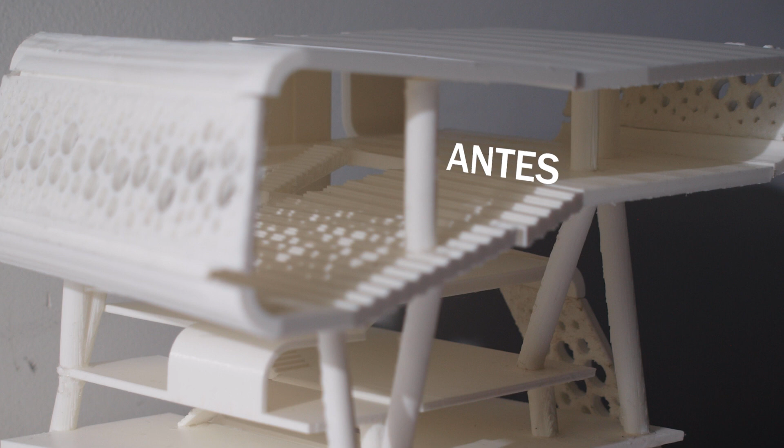We chose the Spanish word for 'before' in order to establish a connection between Rainey Street as it was before the Hispanic population was driven out due to businesses and corporations buying out land.

In 1990, Rainey Street had a small population but a high percentage of Hispanics. As time progressed and Rainey Street evolved, there was a massive population increase, and much of that Hispanic population was driven out.

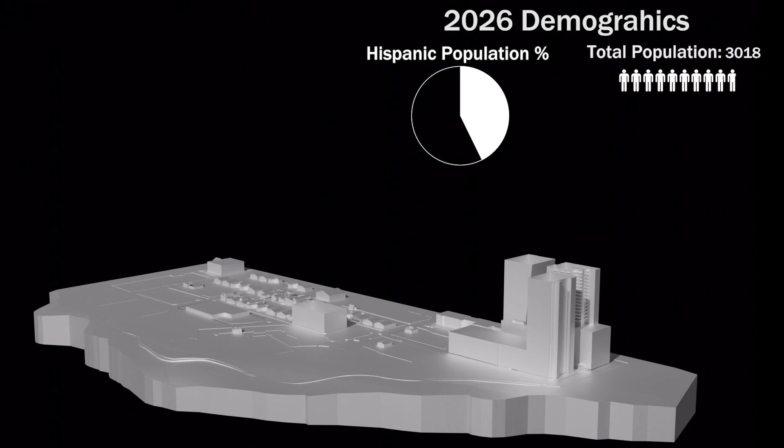To find a solution to this problem, we looked towards the Mexican American Cultural Center. We believe creating a connection with the MAC would help give incentive for Hispanic population and culture to be brought back into Rainey Street.

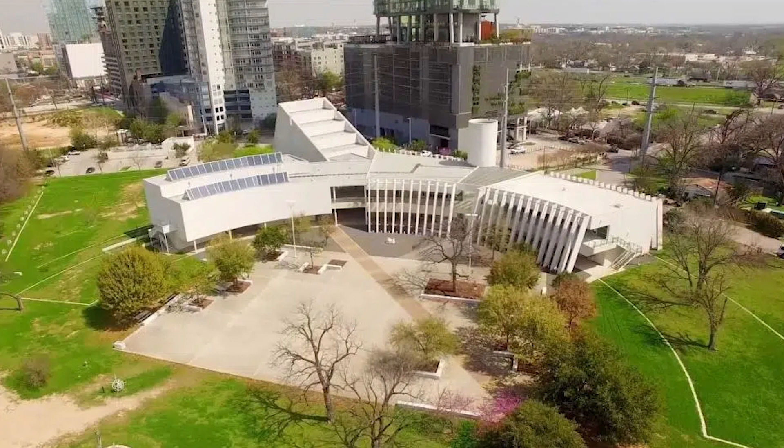Because we are trying to bring back the old Hispanic population, a lot of our programs rely on interaction and participation. For example, we have a church, and this area is missing a walkable church, so it allows the current community to attend church services, but also gives an opportunity for the old community to make their way back.

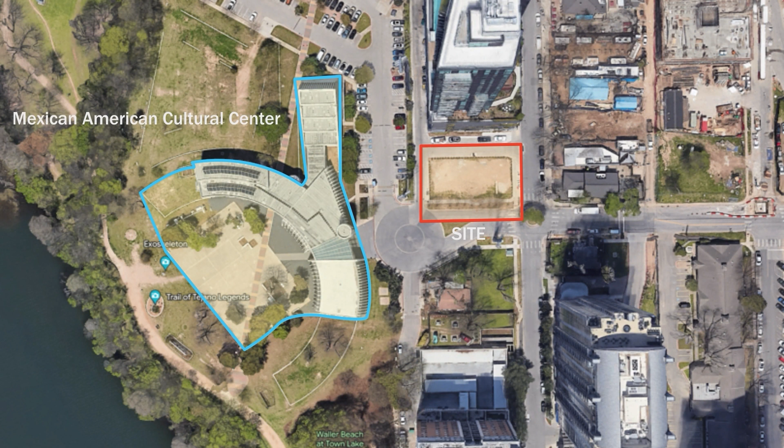This animation shows our site's proximity to the MAC and helps us understand where we are in relation to Rainey Street. This proximity is a key reason why we wanted to work with the MAC.

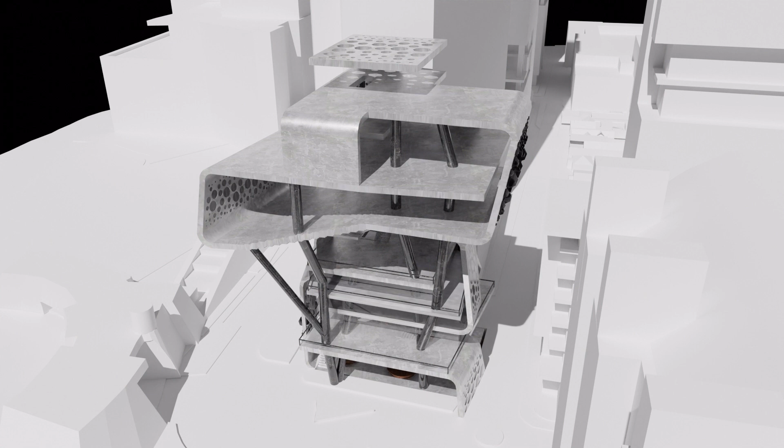Moving on to structure, a key concept we wanted to include during our design process was this wrapping of the floor plates. Almost all of our floors are interconnected to help create a cohesive design, and here our building finalizes by adding in all the details.

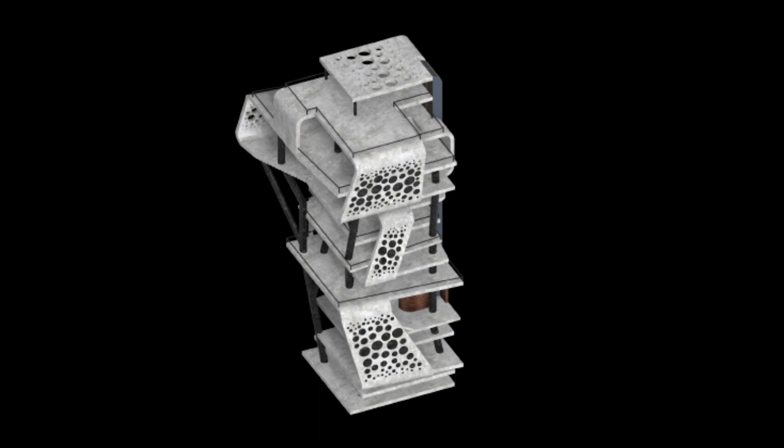We've mentioned that we want a connection to the older neighborhood, so why is our building structured the way it is and not like the old neighborhood homes? First, we wanted to contrast the shapes of the nearby skyscrapers, hence the wrapping floor plates and columns. Second, the floors and walls are interconnected but allow space to see into floors below or above. This creates a feeling of being enclosed, but connected, like a neighborhood.

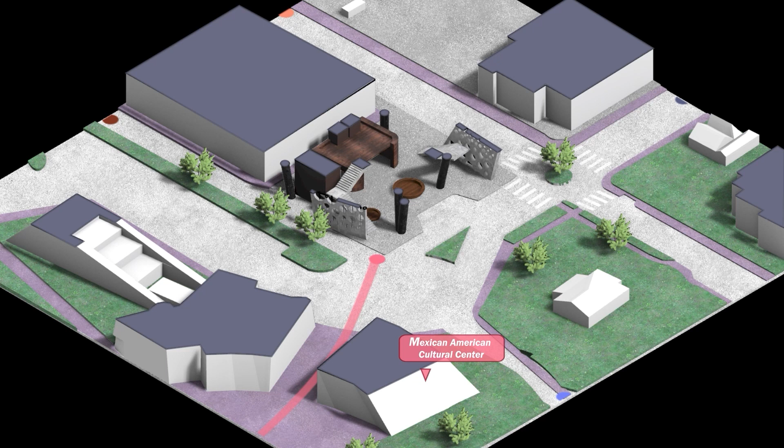This animation shows the interaction with the ground floor. The pedestrian pathways include people coming from the MAC, people coming from behind 70 Rainey and the rest of the Bar District on Rainey Street, and people coming from the walking and bike trail along Lady Bird Lake.

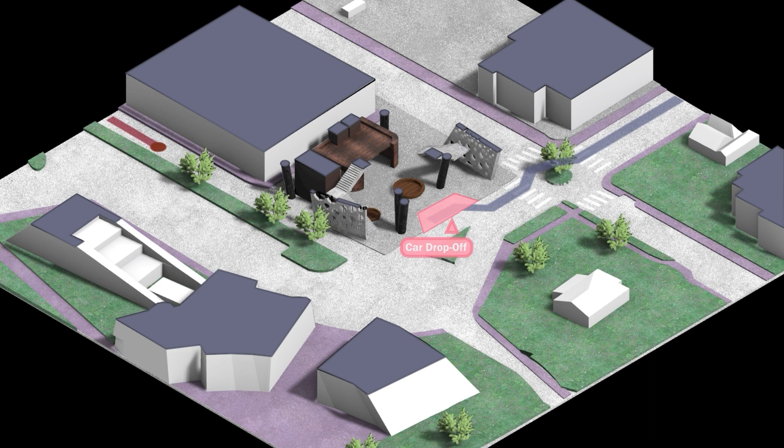As for vehicular transportation, there's a car drop-off coming from River Street, since a lot of people rely on Ubers, but if people choose to drive themselves, there's a car elevator that takes the car into an underground parking. This is an image of our program to show the relationship.

Underground parking is at the bottom, bar section right under the lobby, above the lobby is the vendor spaces, above that is the mall section with boutiques under the food court. To separate the spiritual zone of the church, there is a garden entrance and space, then the church, then the classrooms and play areas connected by the church community, and finally the rooftop lounge.

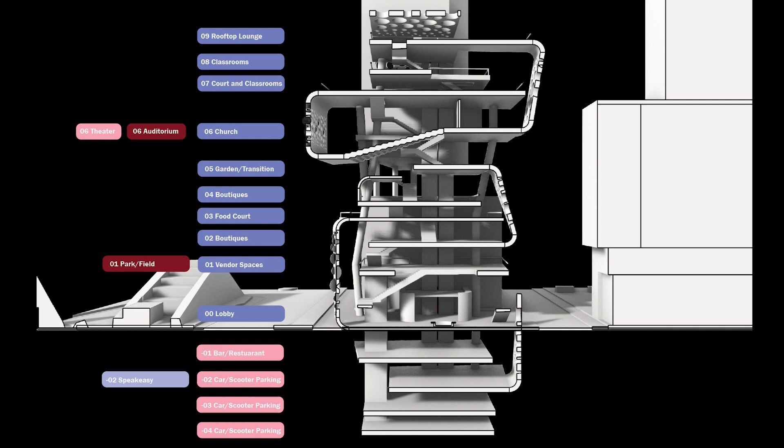This animation shows how the building is used throughout the day. An earlier comment we received is that the building was only used during the day on the weekends, especially with the church and the vendor spaces.

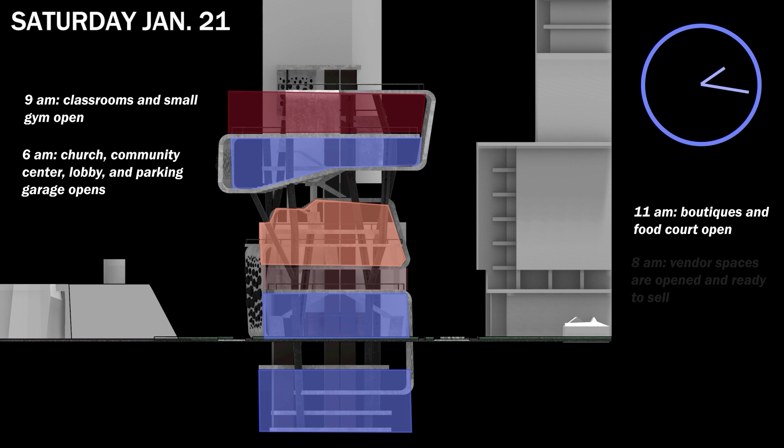However, in the final design, there are three interchangeable spaces to allow maximum use. The church space can be changed to an auditorium for TED Talks and other presentations, and later into a theater to watch movies. Once the vendor spaces clean up and move out, that space can be changed into an open field to play games like soccer, since that floor is grass. And the first floor of the car parking can be changed into a speakeasy to maximize use at night.

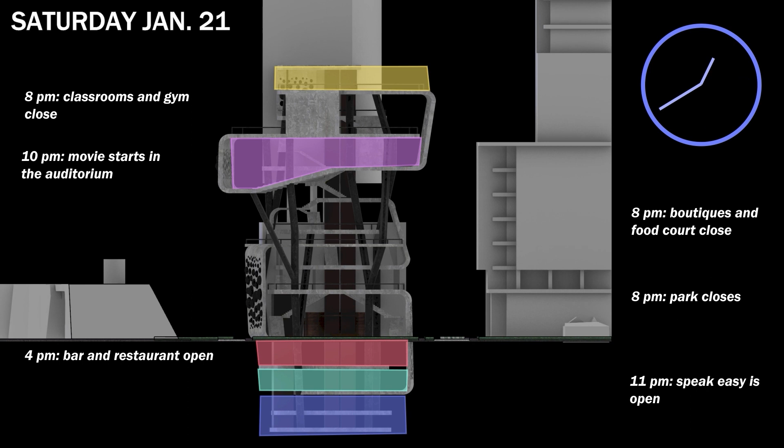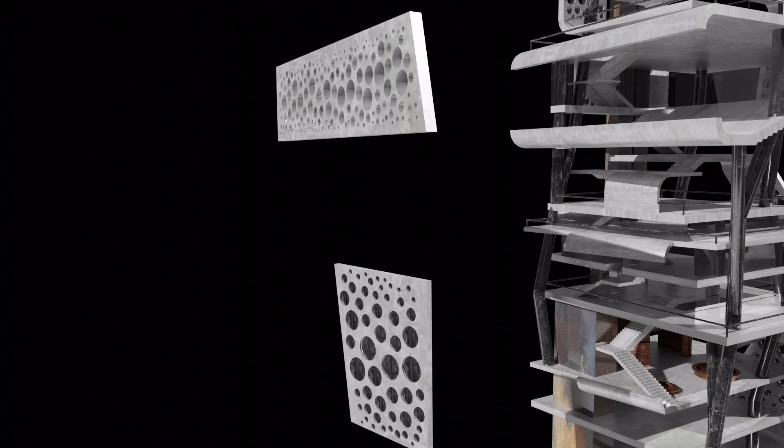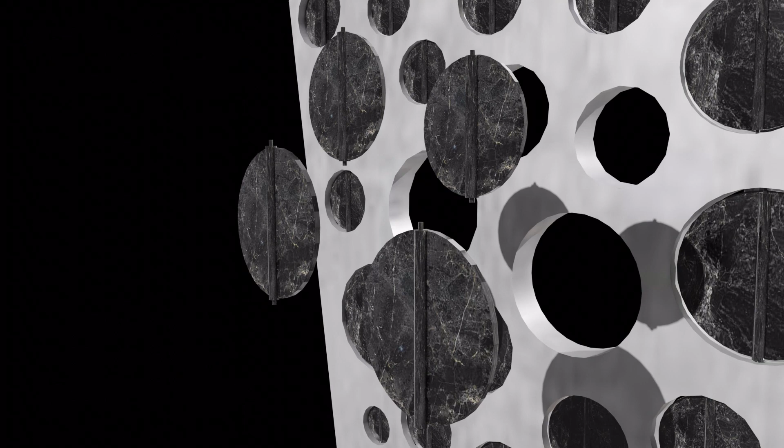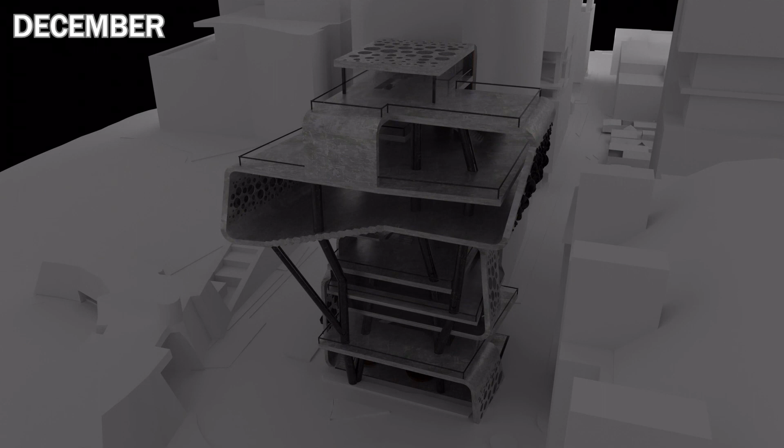This sun animation shows us how the June and December sunlight will be hitting our building. These animations play side by side to help give a better comparison between the two. One design feature we wanted to keep in mind to help with shading the front facade was to include transition glass, or glass that could change its opacity.

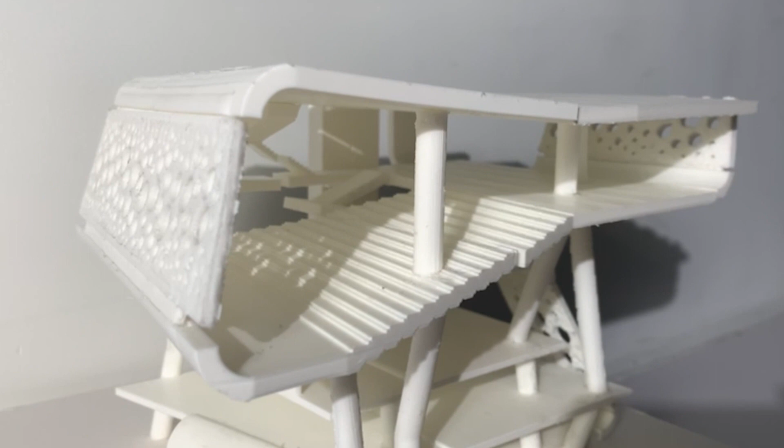And this is just a small physical representation of sunlight being scattered through the perforations in our walls.

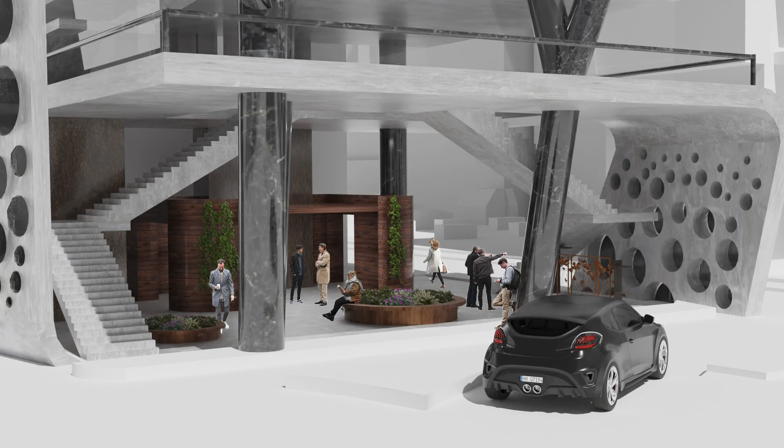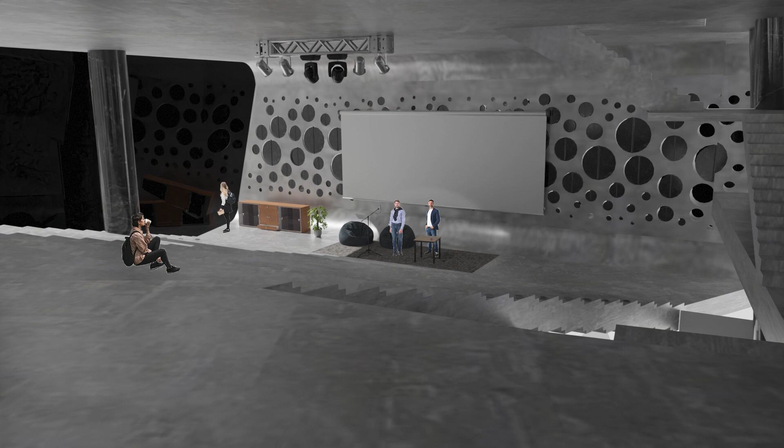Finally, we will be showing some key renders to help provide context as to how our building will be used. First, our lobby space, followed by our boutiques right under our church space. After that, our church space, which right now is just being used as a casual talking space. And finally, our rooftop lounge.